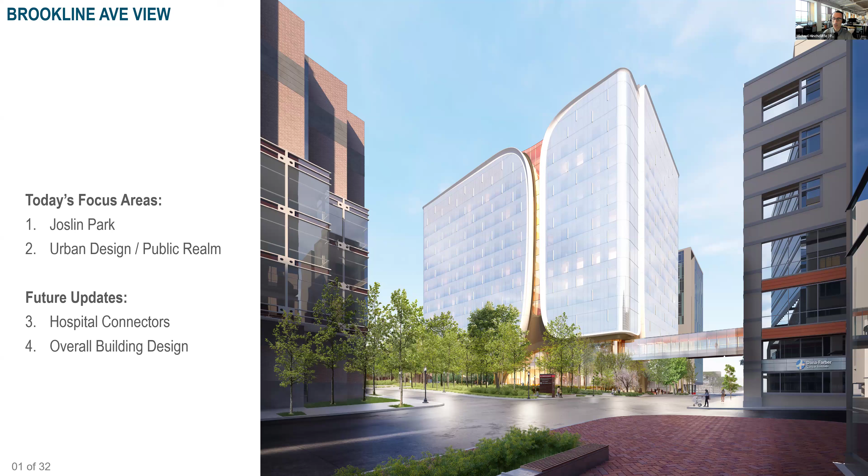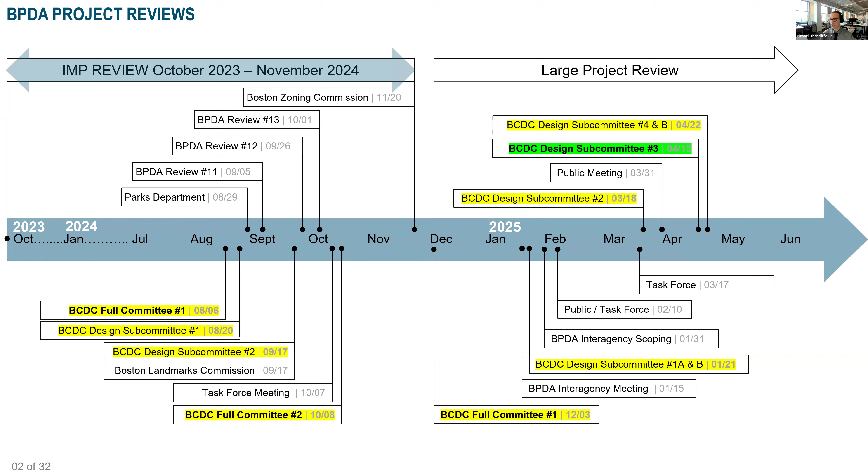As Seth said, we talked a lot about Joslin Park through the IMP process and the many times that we met with you in full committee and subcommittee for the IMP, and then again the summary of when we've met for the specific context of the park. What we wanted to say is that through all of those meetings with you, we heard quite a number of times that we needed to think comprehensively about the urban realm, from building face to building face, and the true pedestrian experience and vehicular experience in the whole district as it impacts the future cancer hospital, the Rosenberg building, which is the home of the emergency department for Beth Israel Deaconess Medical Center, as well as this very valuable public asset of Joslin Park at its heart.

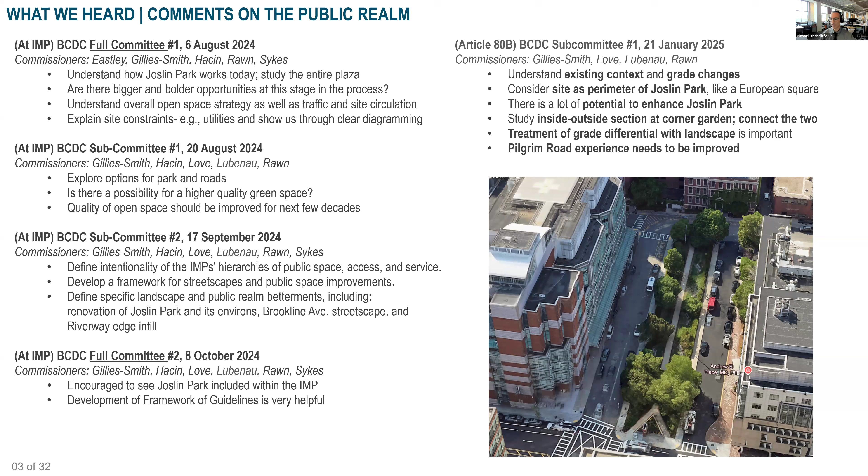We've taken those into consideration, and as Seth said, the opportunity to reevaluate circulation and the park boundaries was one that we welcomed with open arms. Chris has some very interesting things to share with you in terms of the development of Joslin Park.

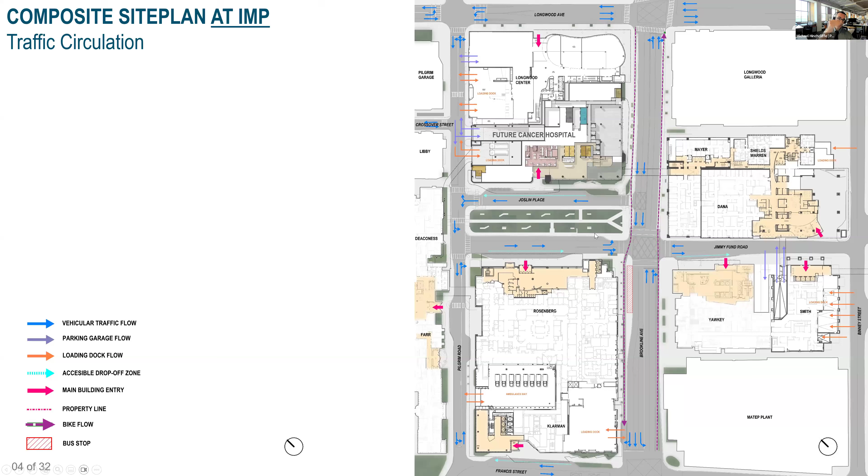As a reminder of the scope, here we are in Longwood Medical and Academic area. To refresh your memory, the Future Cancer Hospital is located between Brookline Avenue, Pilgrim Road, just to the south of Longwood Avenue. Today we'll be talking about Joslin Park, which is currently 2 one-way couplets of Joslin Place, which heads west, and Deaconess Road, which heads east.

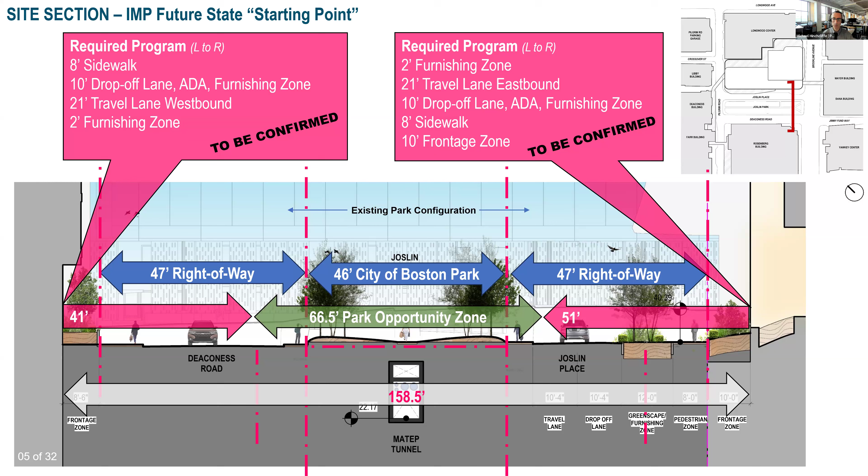At the institutional master plan, we really talked about the need to evaluate, as I said earlier, building face to building face. So when we look at the front facade of the cancer hospital on the right, all the way to the existing front facade of an entry to the emergency room in Rosenberg, how much leeway do we have there to think more comprehensively about the parklands? With this overhead view, and Chris, let me know when you'd like to take over.

We see that the existing park today is similar to parks that you find in the South End or other older areas of the city. That is really a very linear park with static boundaries and edges that has many opportunities, when viewed from its approaches, for a more dynamic environment.

So Chris, let me hand it over to you to talk about some of the design principles that underlie the studies that we're presenting today. Sure. Thanks, Michael, and thank you all for being here tonight.

As you all know, you've encouraged us to look at the park more comprehensively and especially how it engages with the larger public realm. It is, as Michael said, a very linear, narrow site, and the way that it's framed by four streets makes it a bit disconnected from the larger urban fabric.

And so the opportunity to color outside the lines a little bit has been quite liberating, and a lot of fun for our team to think about how this park really could engage the neighborhood at a much larger scale, have a larger impact. So we've gone through this study with some principles in mind, principles that have formed out of conversations with you all, with the planning department, PIC, parks, etc.

These are sort of high level, but have been the underpinnings of all of our studies to date. At the core, this exercise should improve accessibility to, from, and through the park. It should eliminate unsafe pedestrian crossings by redirecting existing desire lines that are often in conflict with vehicular traffic.

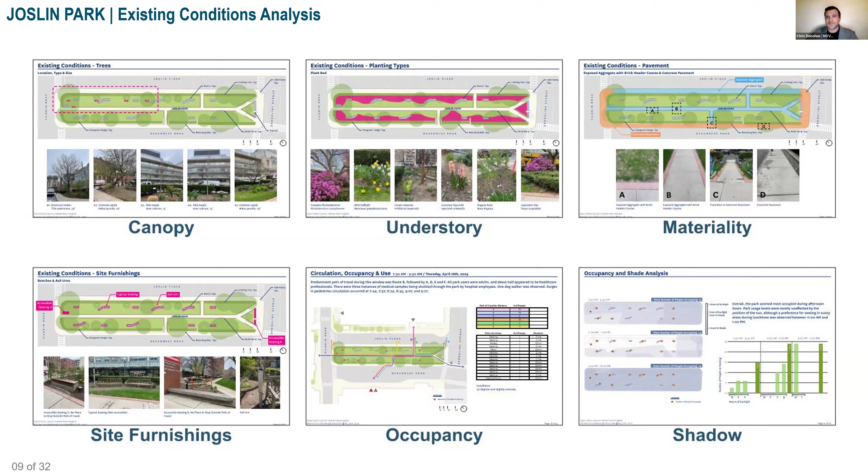We also looked qualitatively at what makes this park a good place to be, a good urban park: the role that planting plays in creating a sort of garden frame in an otherwise very urban and institutional scale environment, the role that an urban canopy plays in providing comfort and carbon sequestration in the city, and the role that ample seating plays in providing a welcoming and accessible environment for people.

But then we also looked at the existing opportunities for improvement, that linearity of the park only sort of exacerbating the scalar issues, right? It's incredibly narrow, and by having just a single path with open lawn adjacent to it and a single frame on either side, it's quite limiting in terms of how the park might be used and the experiential range that you can get from it.

That lawn that frames it, because it's just a single narrow path, is often quite beaten by people walking off the side of the path to go around one another. And that, as I said, the role that the four streets on every side of the park play in really disconnecting it from its context and making it somewhat difficult to access and use comfortably.

As I said, we looked at the occupancy, we looked at how people travel through the site, took a quite detailed mapping of who's moving through the site, when, at different times of day, in different conditions, weather conditions, etc. We took stock in terms of what people were doing there.

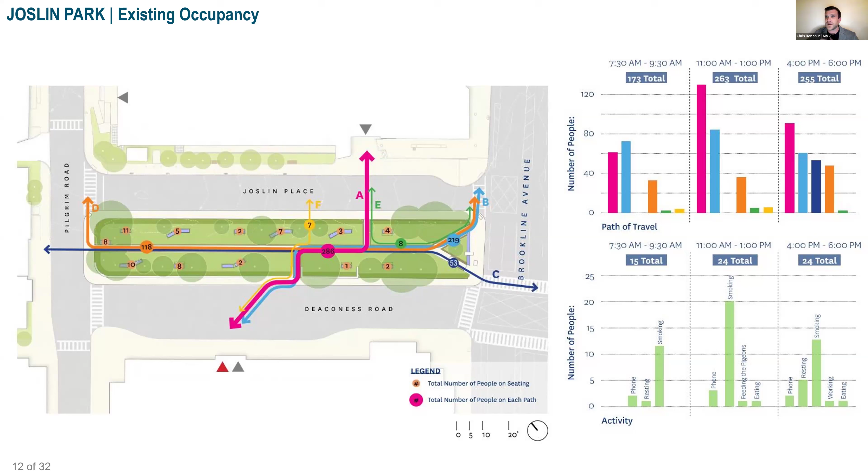We distilled that diagram of pedestrian circulation down to a sort of what does this all mean? And notice that, as I said, quite a lot of people are crossing at places that are not intended for pedestrian crossing. They're crossing, stepping out between parked cars, illegally parked cars, and into traffic on very busy roads. So thinking about how we can improve that condition as well with this study.

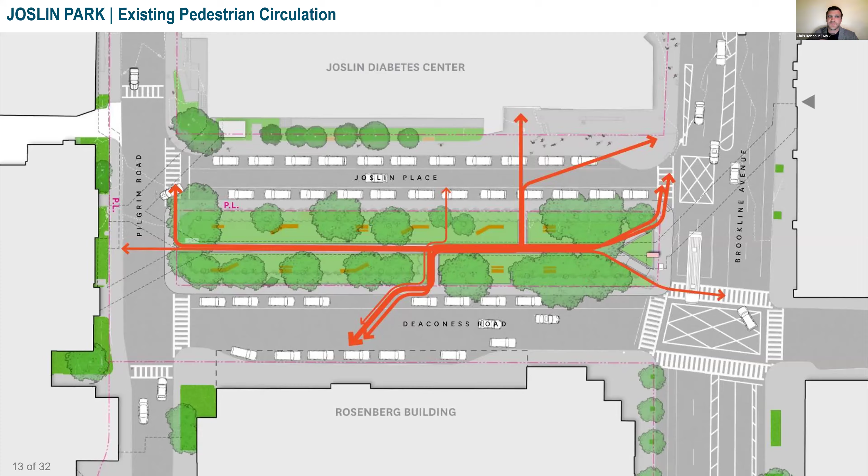As we all know from working in Boston, just like any other urban street, there are lots of utilities that run through the park and the right of way. Some of them are quite shallow, including the tunnel that runs underneath, right down the center of the park. There's also existing chilled water lines and an electrical duct bank that runs along the north end of the park.

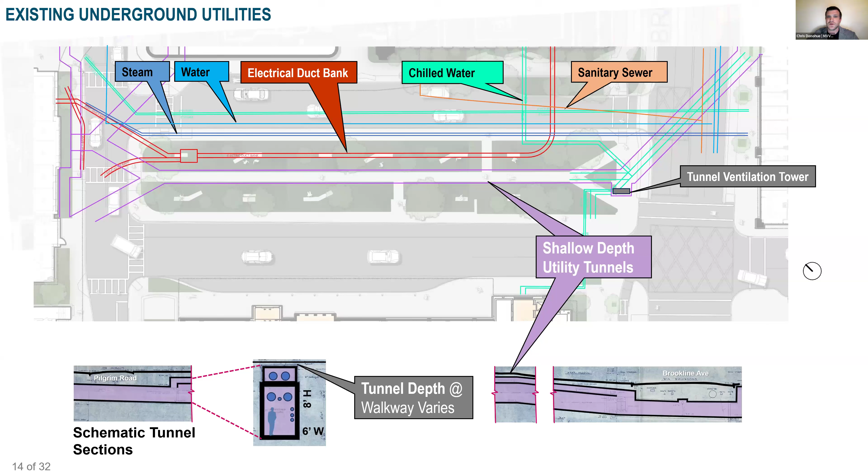And then steam and water lines that run through the street, as well as sanitary sewer, and that existing tunnel ventilation tower that also doubles as signage for the ER just across the street.

I saw when I was preparing just a minute ago that these diagrams are mislabeled—that's my fault. But noting that there are lots of ways to look at this, we've looked at how to manage pedestrian crossings and vehicular circulation dozens of ways. I've distilled this down to four high-level exercises for clarity.

Looking at the first one, a series of perpendicular crossings across both Joslin Place and Deaconess. Those crossings marked in orange would be new.

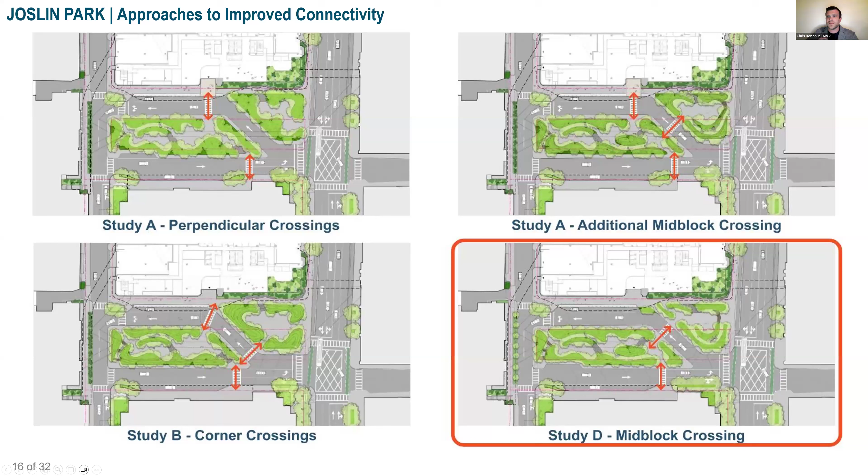Additional mid-block crossings, top right, bottom corner, suggesting that crossings happen at the corner in this new reconfiguration of Joslin Place, and the last one being a single mid-block crossing that focuses pedestrian circulation between the two park networks.

I'll focus on that last plan and how it's developed, just to talk about the park broadly. The idea was to create something with a lot of connectivity through it, connectivity to the adjacent public realm and to the adjacent buildings, connecting to Brookline Avenue and from Pilgrim Road.

Most importantly, in what initially felt like a bifurcation of an already relatively small park, we're actually making it even more well connected to the urban realm, so that these two park networks become really well integrated and quite diverse in how they offer a range of experience for people in the city.

The result is a series of terraces that gradually step up from Brookline Ave to Pilgrim Road—east to west in this drawing orientation—stepping up off of Brookline for a sort of elevated terrace, and then a network of pathways, if you go to the next slide please, that weave these spaces together.

We've turned that gradually sloping lawn with a single path into a network of accessible garden rooms or event spaces that are connected by a really robust and diverse set of meandering paths through the park.

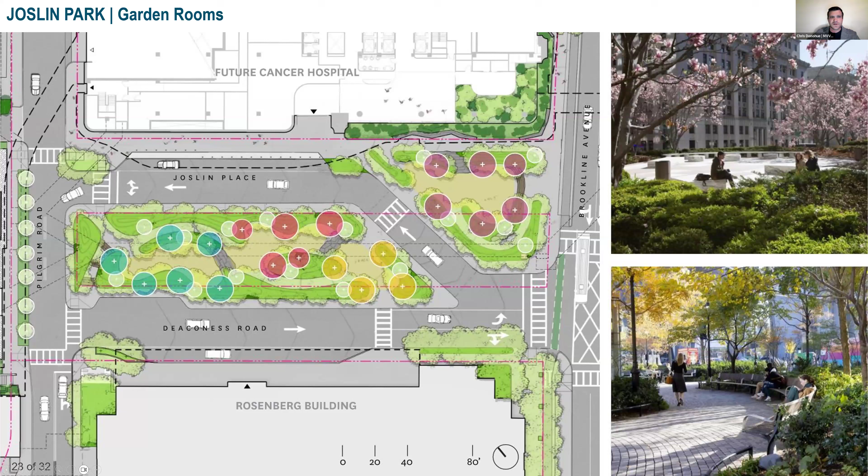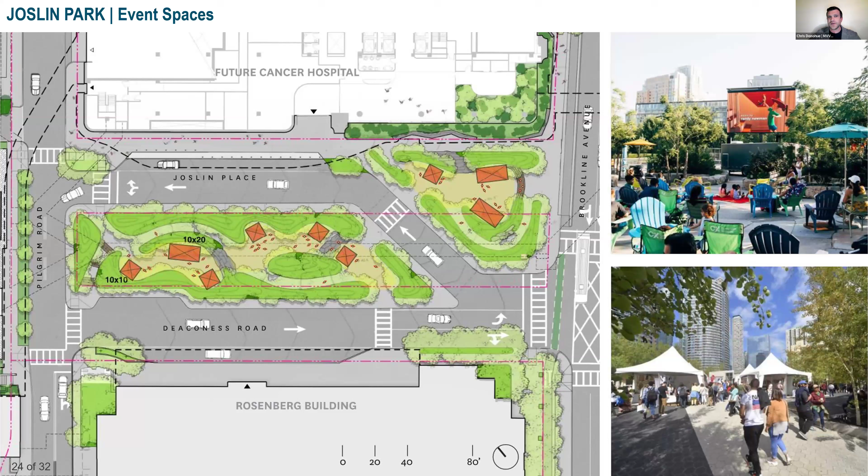Thinking about how those landscape rooms or garden rooms can also be programmed and activated. They're not very large, but they're large enough to be pretty impactful in terms of gathering people. This shows a series, just for instance, of 10 by 10 and 10 by 20 tents that could be used for farmers markets, or a networking event for the LMA. Lots of ways to think about how we could use this space, and it becomes more of a destination within the city.

Those rooms are framed by a series of garden meanders that are framed by planting, allowing for a more robust urban canopy and lots of ways to move through this in a very accessible way.

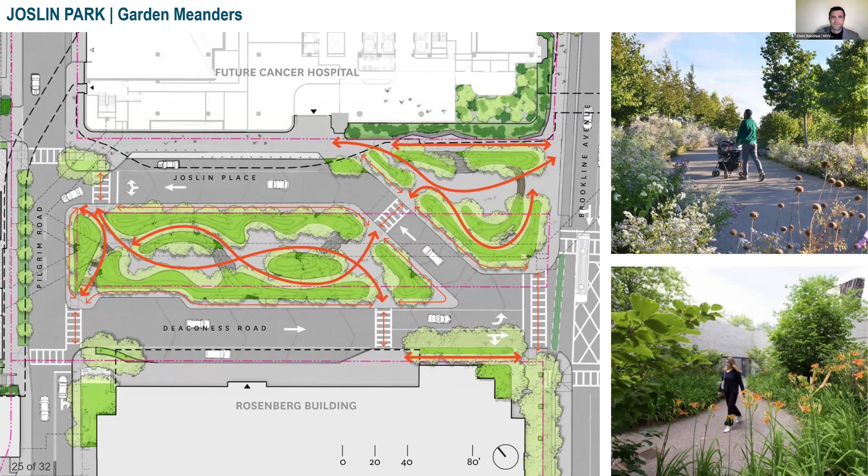Some of that negotiation of grade becomes an opportunity to create gathering places, amphitheaters, stone outcroppings, places for people to sit and eat lunch and gather together.

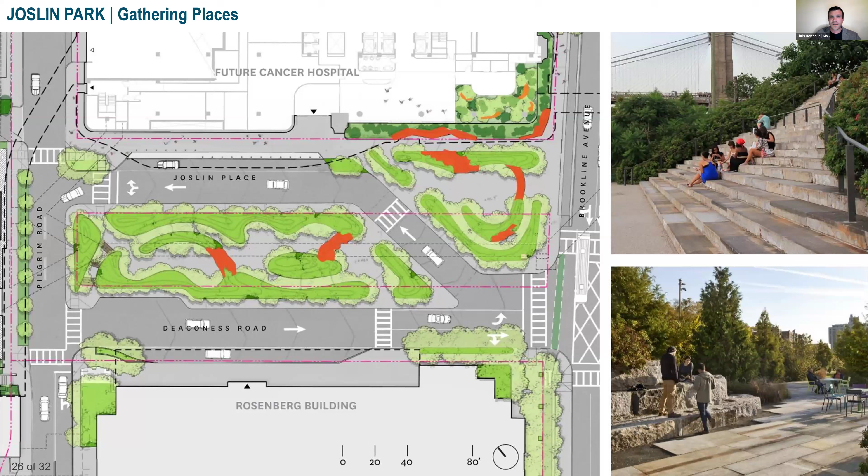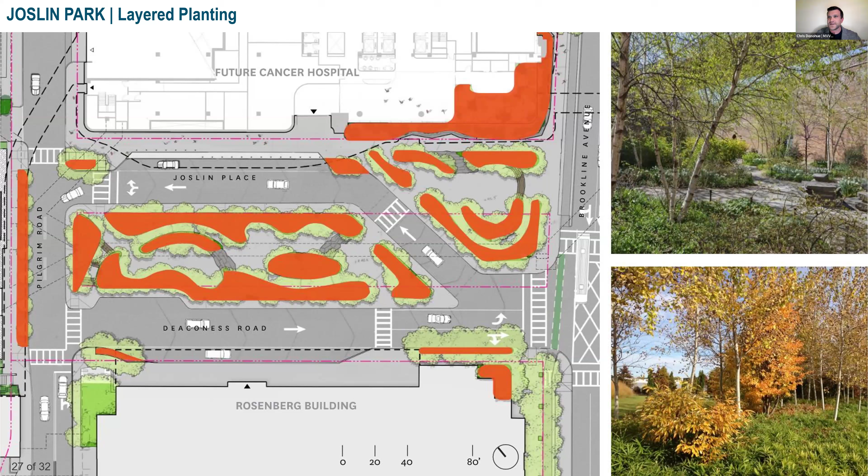Those rooms are framed by layered planting, understory, mid-story, and canopy trees. Those of you who know our work know we're really into planting and creating really robust urban environments.

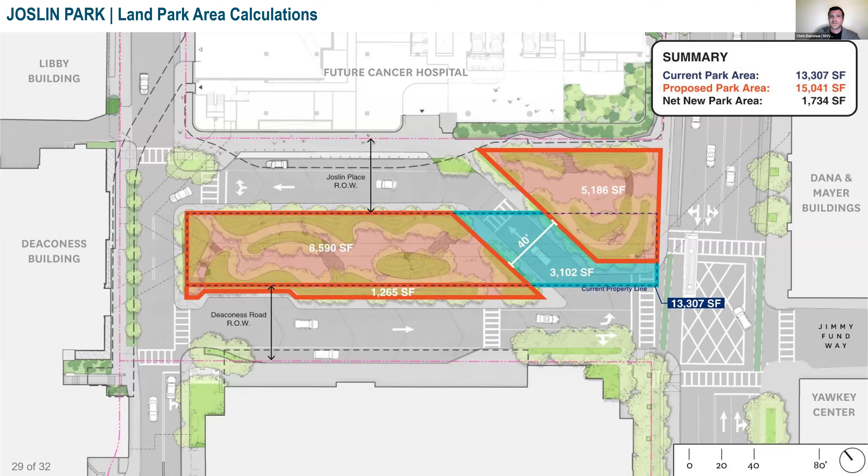This also shows how the plan negotiates and helps to simplify some of the really important traffic that comes with the medical facilities in this area, creating a new visitor and patient drop-off area for the cancer hospital, and a valet or patient drop-off for the emergency room at Rosenberg.

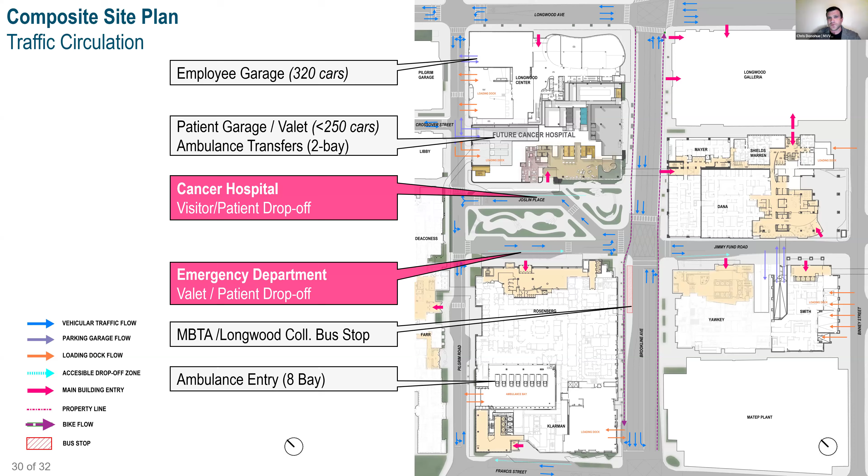We can leave it here just for conversation, I think. But the idea, or the opportunity, is a park network that's really well connected, brings people into this park not just for a quick phone call, but gives places to gather, places to spend time, ways for the LMA to gather as a community in outdoor public space, and significantly increases the park's capacity for programming and accessibility.

Thanks, Chris. That concludes our presentation, Seth.

All great, right, commissioners. Anne Marie, I think you're muted. Okay, thank you, sorry about that.

Thank you for the presentation. I just have a question: could you talk a little bit about circulation through the site, in terms of how patients or people there with family members would move through the site? As we've reviewed this project, I know a consideration has been the movement between buildings, there is pressure on internal circulation to move between them. Looking at this plan, the circulation as outlined looks a little bit circuitous. I'm curious, if I'm in one building, is it likely I'd be moving from Rosenberg to the future cancer hospital? Help me understand the typical movement between buildings on the site.

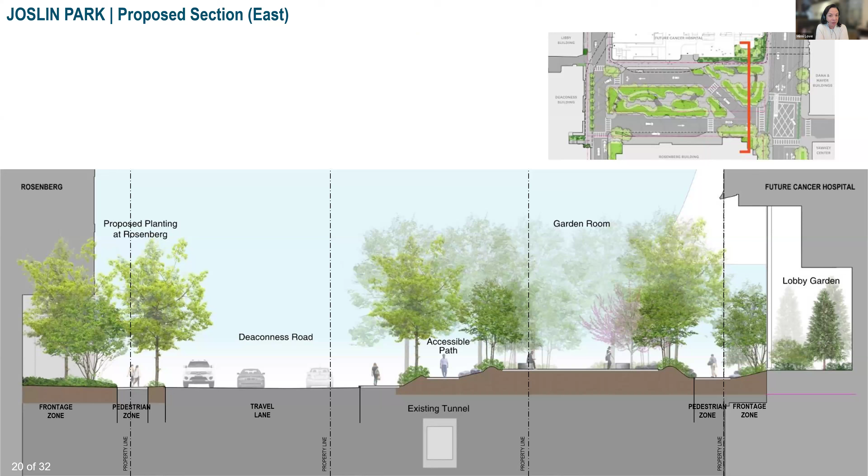Maybe I'll chime in because I'm going to echo what Shauna said. I think this is very exciting. I don't think we imagined that it would be so transformed. But what's really strong is that connection between the winter garden lobby to now the landscape. And this entry point, in my mind, really rationalizes where your entrance is to the building. Remember, I was always a little bit challenged by where that entrance is. And now I think it actually almost post-rationalized. Maybe you knew it was going to happen the whole time, but I didn't have that insight. So I think it's really strong.

I do have two questions. There is that one sidewalk that's labeled, between the winter garden terrace and the terrace that's labeled 43.5. There's that sidewalk at 5%. It kind of feels like it's taking you to nowhere. There's not really a crosswalk. And so I'm just curious about what happens up and down that street. I'm not suggesting that it goes away, but it just feels like there's no destination for it. So something might be considered there.

And then the other question I have is, because emergency vehicles are getting to the Rosenberg building, I trust that you worked this all out, but it feels like there's almost a pinch point, and I just want to make sure that all of those discussions have happened with BTD to make sure that that's not going to slow ambulances from getting to the Rosenberg building. But overall, I think this, I echo what Shauna says, very exciting.

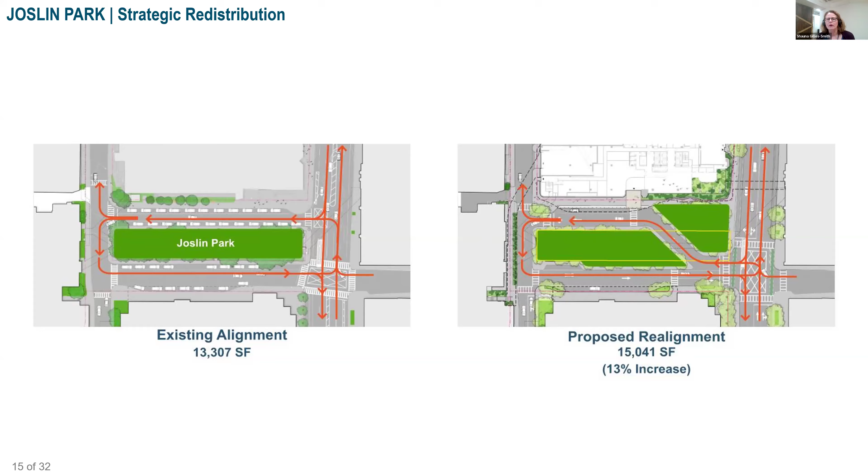Yes, very specifically, the width of the redirected Joslin Place is one 20-foot way, one single lane of travel with no parking on either side. 20 feet is the minimum for emergency vehicle access. So the single lane continues as a single lane of travel throughout Joslin Place, defining a distinct drop-off organized into accessible drop-off and regular drop-off underneath the canopy of the hospital entry. Joslin Place is intended to be one single lane of one-way travel from Brookline to Pilgrim Road, with a distinct defined drop-off and no parking intended on either side for its length.

Deaconess is similar. It is also sized as one 20-foot travel lane with one singular drop-off organized for both valet and emergency drop-off. At the future cancer hospital, we'll have valet parking and service inside the garage.

At Rosenberg, it's still a very busy mixed entry, but the proposal is for one lane of eastbound traffic. We are holding, for discussion purposes, a separate lay-by here that could be used for shuttle bus staging, or for overheight transport vehicle parking. Sometimes chair cars and other patient transport vehicles aren't large enough to enter parking garages, so this serves as a kind of lay-by staging area for those cars.

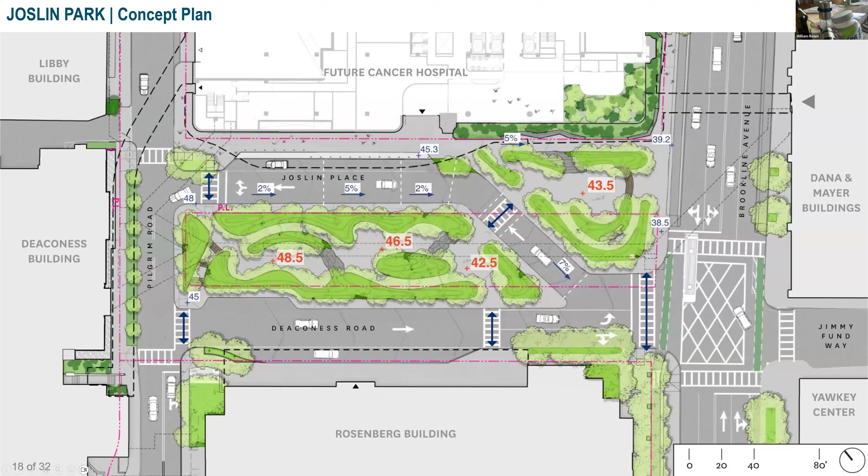This is Bill. Michael, or anyone can answer my question. This follows from a couple other questions that have been raised. I'm looking at the buildings on the east side of Brookline Avenue and imagining people from those buildings wanting to use this park space. I realize there's real advantage to having consolidated traffic coming onto Brookline Avenue from either side—that's a very positive thing. But I am struck by the fact that there's not kind of a through passageway from those crosswalks on the east side of Brookline Avenue into the park, and I'm curious why that is.

Chris, do you want to respond to that? Let me know if there's a different slide you'd like me to bring up, Chris, to talk through this. No, this is a good one.

It's definitely something we're still wrestling with. I will say that negotiating the 10-foot grade change from east to west plays an enormous role, while also trying to stay above that existing utility tunnel—it plays a very challenging but enormous role in trying to weave these navigable and accessible pathways through.

So I think we're still trying to get the desire lines exactly right, and you've identified a good one for us to focus on as part of a next study. But I think the idea is that coming from that intersection you've highlighted, people would either walk along the sidewalk that runs along that new slanted, realigned portion of Joslin Place, or just go a very short few steps to the north and up into that terrace, or through that meandering pathway.

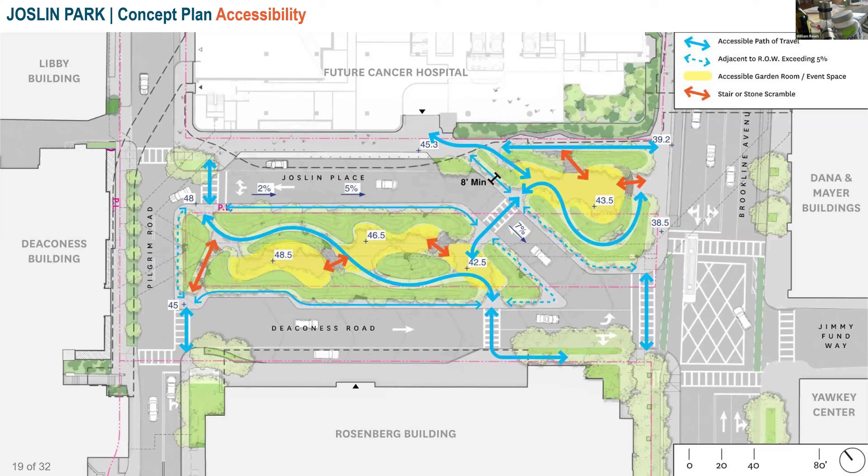I'm still learning the elevations of this, but I encourage you to continue to look at that. Certainly, thank you.

Go ahead, Anne Marie. If I could just add to that, I want to continue to push a little bit on the role of connections that Bill was describing, I mentioned earlier. As I reflect back on the evolution of this project, I think a big piece of what I felt we've been grappling with is how do we unify this collection, how do we take this opportunity with a major investment by the hospital on one of the sites to unify a collection of buildings that have a shared purpose. And I think the park, in my mind, has always played a pivotal role in that.

So this is not a critique of the quality of the landscape you've created, but rather thinking about the relationship of the landscape vis-a-vis the campus of buildings. And I just can't help but look for something that is a space that helps to center an individual, much the way Central Park, albeit totally different scale, is sort of a center or an anchor for New York, for the neighborhoods surrounding it.

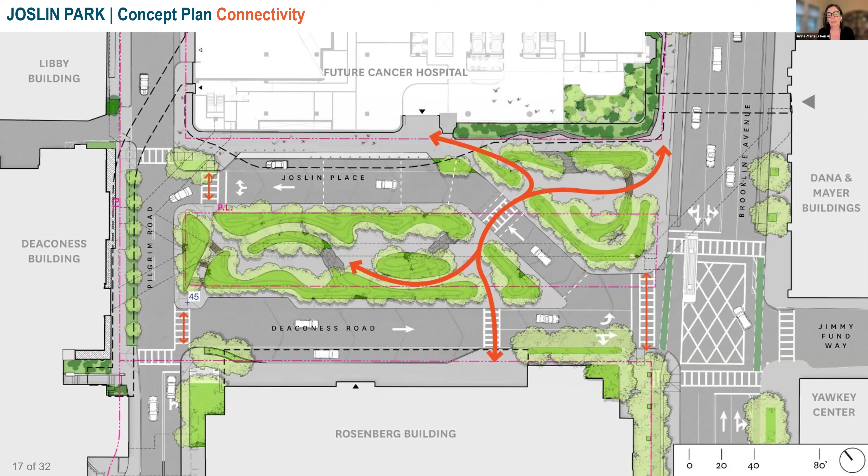And I too am trying to catch up and understand the role of grading and elevation. When I look at the plan, it frankly creates more confusion for me than assistance, and a sense of centering. So that's just one thing I'd encourage you to think about as you look at this.

And frankly, even driving, making that turn from Brookline into the campus, I worry a little bit about turning in there in a car and thinking, oh, is that one street two-way or not? Just sort of thinking what is it going to feel like to turn into that space. So I know the team has a lot of experience. I have confidence you will figure this out, but these are the questions that come to my mind when I look at the proposal. Thanks.

Can I just pick up on that?

I'm not agreeing or disagreeing completely with Anne Marie's statement, but I think at this point there's a real consistency in the green kind of closing off the outside. In developing the project, a lot of it will be about the scale of the planting and where the trees are thicker and thinner to help with that visual connection from one side to another. I think that's really a subtle development of the plan from my perspective, rather than a dramatic change.

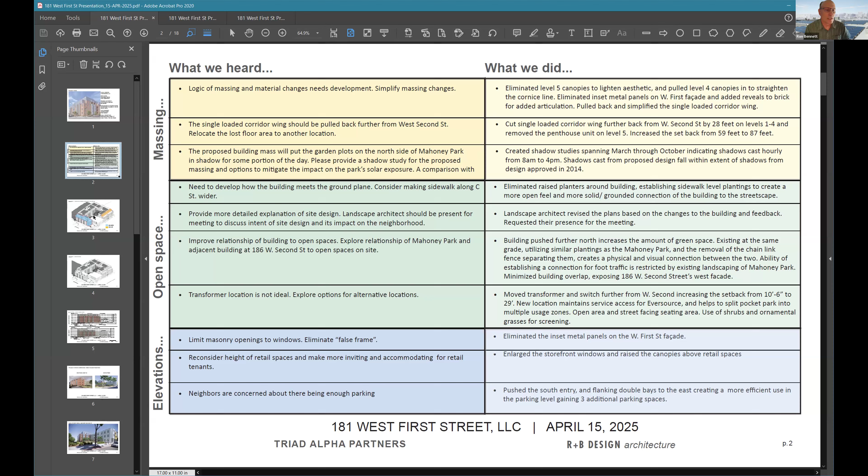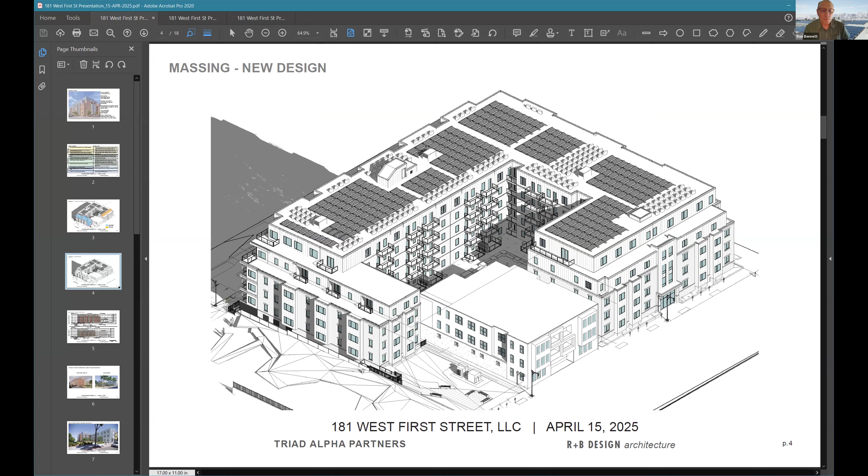This is the western side of the building facing toward Mahoney Park. This is what we're proposing today. We've stepped back both the 4th and 5th floors to reduce shadows on the gardens next door in Mahoney Park, and pulled back the entire 5th floor on this wing to reduce its impact on the park and our neighbor at 186 West 2nd Street, an existing building that we're essentially building around.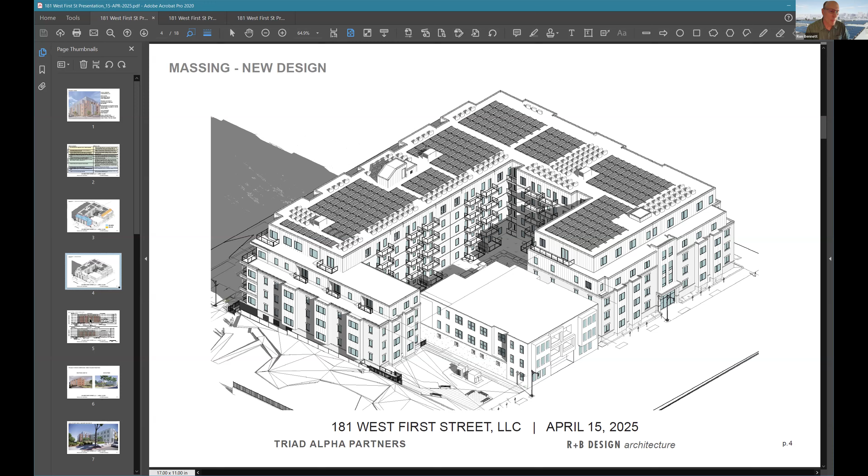On the west facade, I want to compare where we were in January to where we are now. You can see the penthouse at the top on the 5th floor has been eliminated, and the entire building pulled back from less than 60 feet from the property line on 2nd Street to almost 90 feet now, resulting in a pocket park that we're creating in front of our building, adjacent to Mahoney Park.

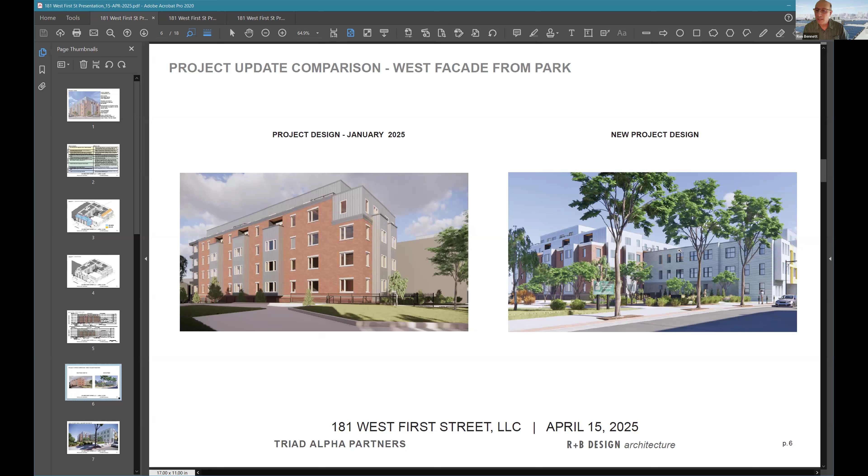Here's a 3D view of that modified design—the original presented here in January, and then the current design with the pocket park developed, also showing our neighbor's building at 186 West 2nd in more detail. Another view of that same space.

We have a landscape design by MDLA—if you have any questions, Anton's here to answer them. We're surrounding the building with sidewalk level planting, anywhere from 5 to 9 feet around the building, and adding a number of street trees. Of course, the feature open space is our pocket park adjacent to Mahoney Park.

The grade is essentially even across the property line, although there are established plantings now in Mahoney Park that we'd prefer not to disturb. So there's a visual connection, and the spaces should read as one—our pocket park with Mahoney Park—but there's no physical connection to walk between them, though they are easily accessed from the sidewalk on West 2nd Street.

We have our electric service in this space for lack of another place to locate it on the site, and we will screen it with vegetation to do our best to conceal it. Mahoney Park actually has something very similar in this area, number 6, where they have their switch and transformer close to the street, also behind a vegetative screen.

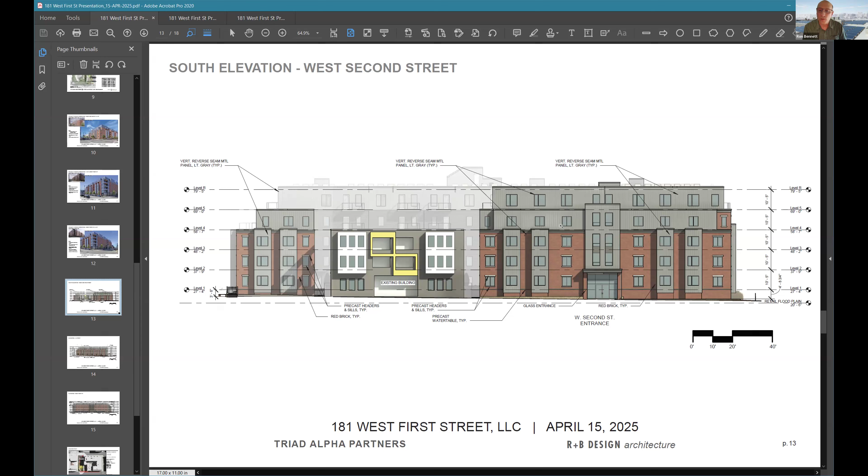We have elevations here, which I think are really better represented in the 3D renderings, but we've got them here for reference. Our 3-story building relates in height to our neighbor, and then we've got 2 stories above that in metal with the 5th floor setback. The C Street facade and the First Street facade.

I do want to mention that in the refinements we made to the massing and the setbacks we added to the west side of the building, the shadows—I have a complete shadow study, but these are a couple samples from that study that show that the shadows cast from the proposed design as it stands today fall within the shadows that would have been cast by our 3-story 2014 design that was approved in 2014.

So this is April, August at 11 a.m. And you can see the shadow falling within the red dashed line, which represents the shadow cast by the design approved back in 2014. It's later in the day, middle of the summer, and we're not casting, in midday, any shadows on the gardening plots in Mahoney Park next to us.

If you'd like to see plans, I have them in an appendix. We really wanted to focus on the massing and the building envelope or the facades. I do have additional plans and renderings if you'd like to see those.

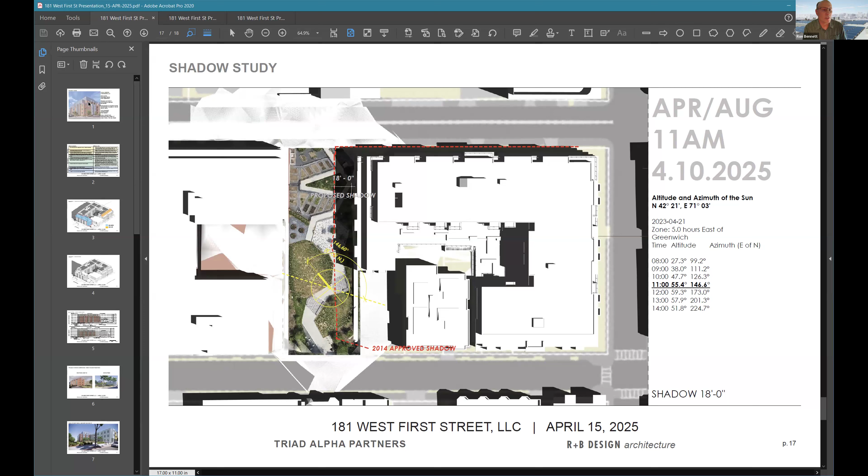Ron, I might suggest focusing on the proposed open space. Yes.

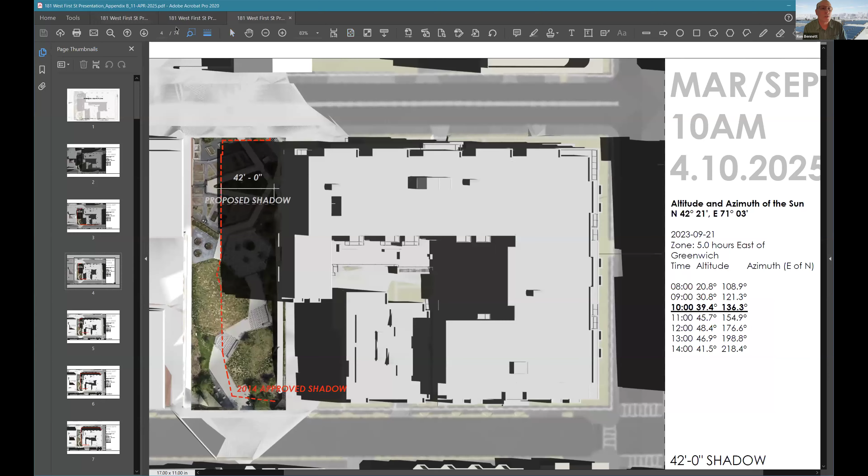We have open space in front of the building, what I'm calling the pocket park. And then, you know, I do need to refer to another plan because I don't have one that shows the interior courtyard. Here it is.

So behind 186 West 2nd Street, we have a courtyard, an internal courtyard with private decks, and it's elevated above street level, approximately 3 to 4 feet above street level. We'll have common area space for any of the tenants to use, as well as some private decks shown here in this lavender color.

That's our open space for the tenants only, and it's our intention to try to reserve this space out front, the pocket park, for tenant use as well. I mean, it's essentially their front yard. And we do have Mahoney Park right next door, which is a public amenity. And then, of course, there's landscape buffers all the way around the building.

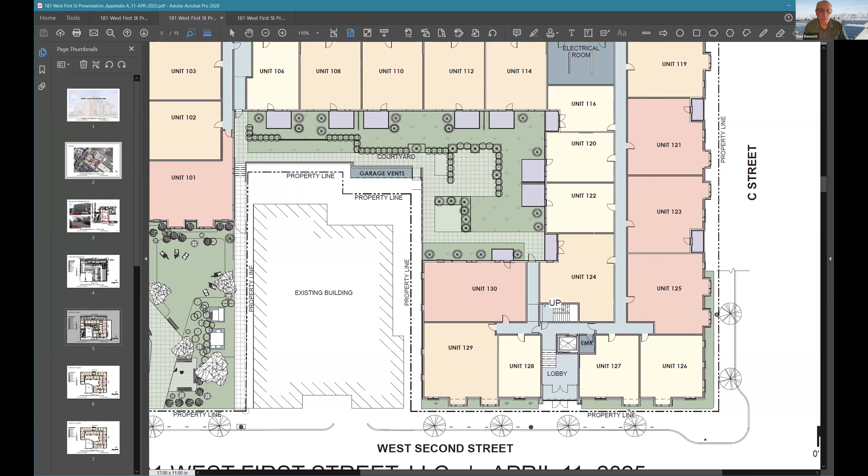And on First Street, oh, I need to go to a different plan. Here it is. Where our retail spaces front on First Street, we've got outdoor seating, wider planting areas, and a nice wide sidewalk, bike share, street trees, and a dog relief area.

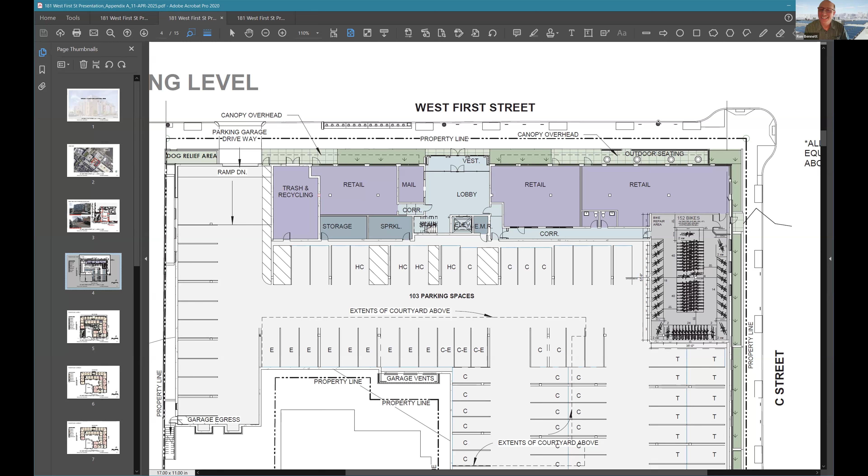Do you have any questions about the open space or anything else? And Ron, did you say your landscape architect was with you this evening? Yes, I'd like to introduce Anton from MDLA. He can get into more specifics about our pocket park and the landscape design.

So I might ask for you all to do that in the final minute and a half you have. I would say in particular the streetscape as well as the pocket park. If you could just go into a little more detail about materiality and programmatic intention, that'd be great. Sure, I'd be happy to.

Yeah, we're complete streets compliant. We're using the 4x8 foot tree pits, 30 feet on center. There's currently no existing trees on West First and C Street along our property, so we'll be adding green to those areas, which we're really excited about.

And we're also adding a lot of guest parking spots, everything that obviously Complete Streets calls upon. We're running that brick apron pattern along the concrete walkway to match what's going on in the neighborhood right now. Permeable pavers at all the entrances. We want to add a nice...

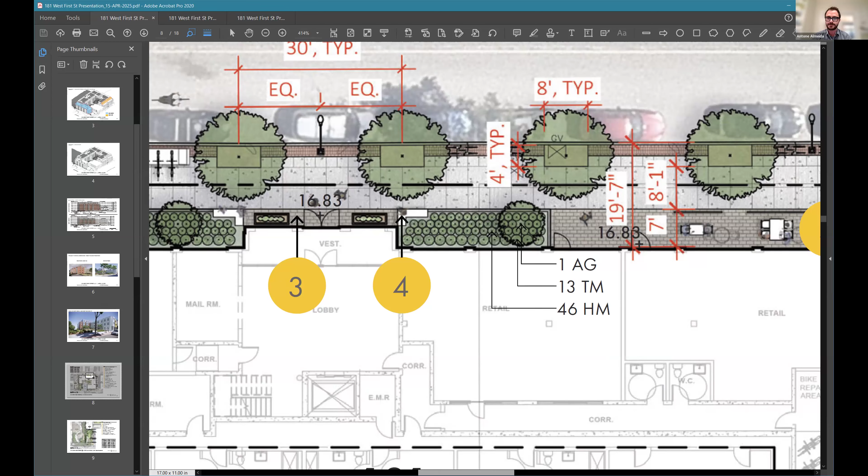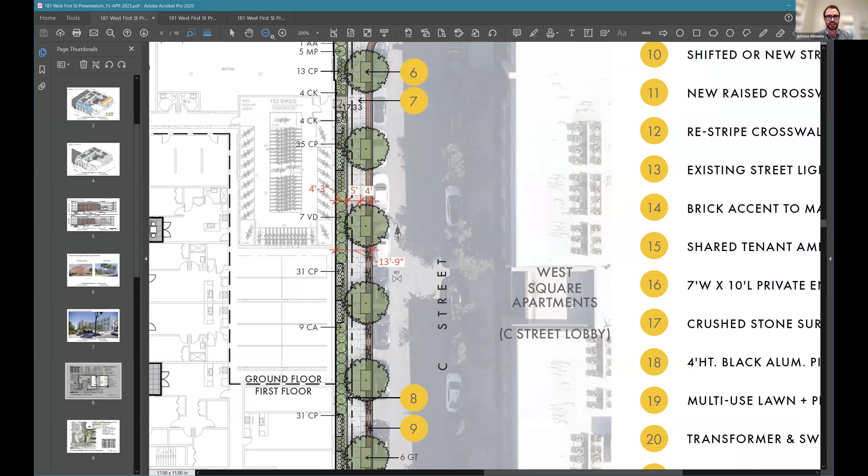And then moving east, we have some more permeable pavers and some patio seating. There's a little bit of a slope, so we have a wall and fencing there. And then, moving down C Street, we've incorporated taller shrubs where we can, and where there's building overhang, we have more of a low ground cover, while also adding a row of honey locusts along that street. And then that's a continuation of the honey locusts around that corner, more permeable pavers, and then more planting that obviously does better in the sun, as this will get more sun in this location.

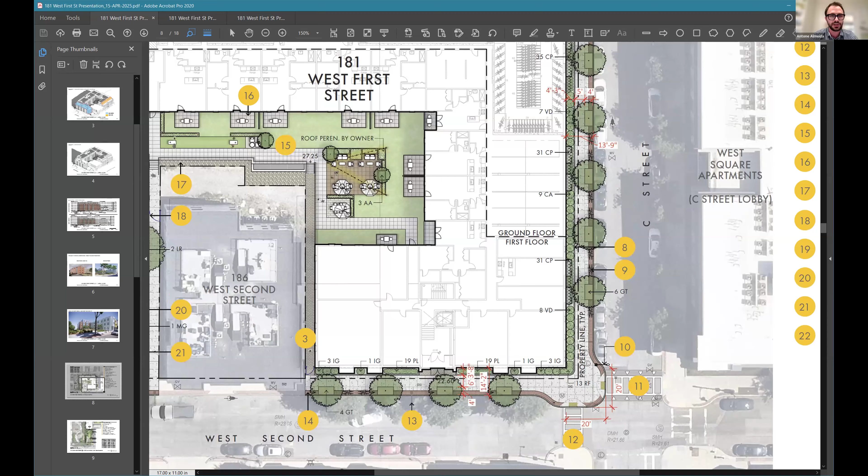And then I could quickly review the amenity deck. We're showing a variation in the type of paving up there. We're using deck tiles and porcelain pavers as well. So we wanted to break it up into a game space, and into social areas for the tenants to enjoy, while also giving a little bit of privacy to the private patios that everyone has.

Can you describe, I understood it was 3 feet higher than grade. So how does that intersect with the adjacent building? The intersection, the middle building's first level in the rear is a parking garage. So we are probably 3 feet higher than their parking garage, which comes up 8 feet. And then they have a little yard space behind their parking garage. They don't seem to be using the yard space very much, but that first level is a parking garage for them. Our parking garage, which comes up below this courtyard, the center courtyard, is about 3.6 feet above grade in this area. So their garage is about 8 feet above grade, and ours is about 3.6.

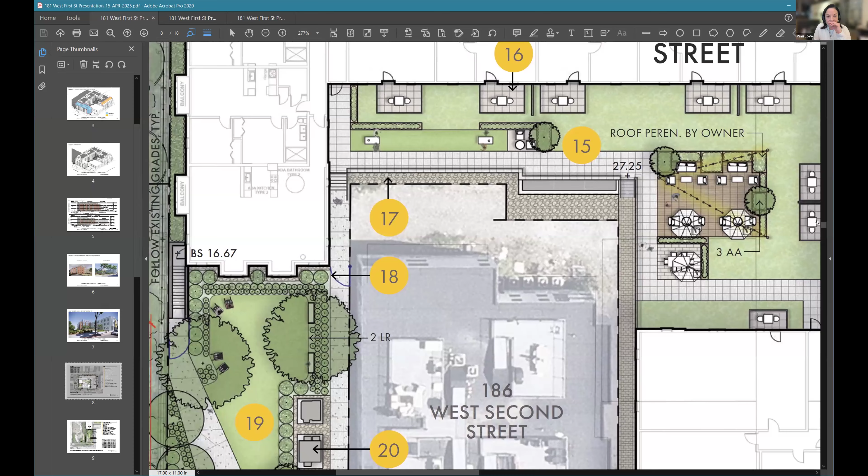Okay, now we're at grade on the sides coming down next to them. You see these two staircases that come down. We come down to grade pretty quickly, and all that area is at grade around their property.

I don't know that I'm understanding. Is there some retaining wall? There's a foundation wall that is right here. It's part of the foundation wall of the building, because that's the garage, and this is a foundation wall of the building too. That's units on one end, and then as you go over, you have the foundation wall. So that's all foundation wall.

Our concrete podium sticks out of the ground back there, but we're still well below their first floor. You're about 3 feet above grade in the living areas. This is all built on top of the garage. This courtyard is built on top of the garage. We have parking under here.

So that dashed black line is the property line, right, but that's at grade with the hatch area north of it. Yes. Okay, and then so the retaining wall is what you're calling the foundation wall. Yeah, it's the foundation wall. We're set back 3.5 to 5 feet from the property line in all cases.

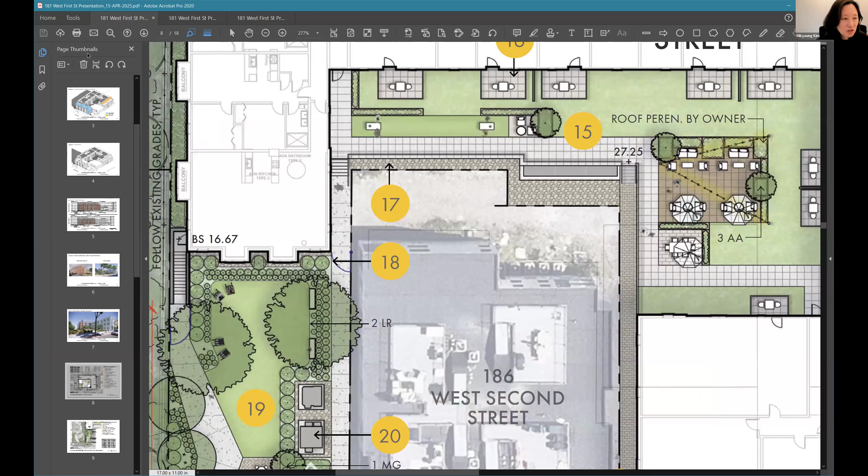Is there any other questions? Could you just talk about the semi-public park? Sure, Jason. And specifically the relationship, like the transition between that park and the public park. Is there a fence between the two? So currently there's a fence, and what we plan to do is remove 70 feet of it.

And we plan to follow that grade. So if you're walking on West Second, the goal is you won't notice the difference between Mahoney Park and our pocket park. It'll all look cohesive. That's kind of the goal that we have here. And then also we want to block those transformers in Mahoney Park because they're a little bit large, so we've added some shrubs there and some river birches, which are doing really well in Mahoney Park right now. So we really want it to be an extension of Mahoney Park because we know it's really an important part of the neighborhood, and we want to embrace that and have that carry over to our site.

And just to provide the visual extension: the fence is removed, the grade along both sides of the property, all the way from Second Street to First Street, both properties will be graded at the same grade. So the grade will follow the whole park from one street all the way through the whole block down to the other street.

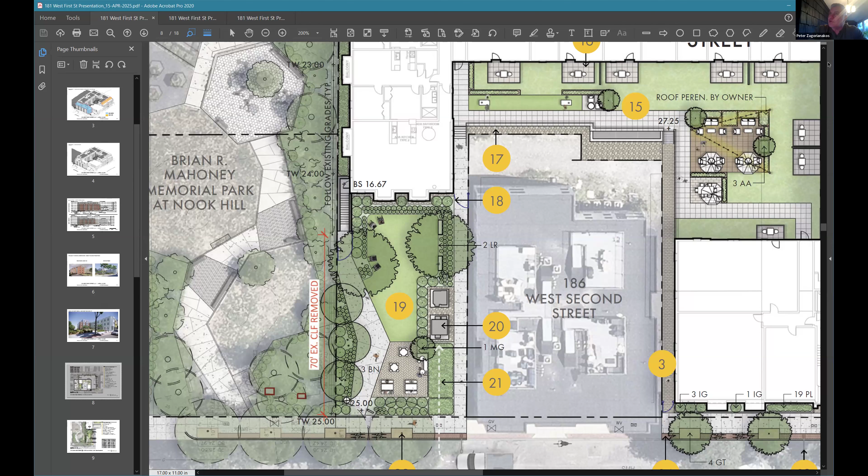That's why we're recommending that there's a 6-foot fence currently between the properties. We're proposing that we take down the first 70 feet of the fence so that the plantings merge together and there is no identifiable barrier between them. And then for the rest of the park, they have a 6-foot fence, which we're suggesting we reduce to 4 feet to make it a little more visually friendly as it continues down from approximately this point to First Street.

And by grading them to the same grade, they have a current block system that grades higher than us, and we will grade to their grade all the way down, using that as the grade coming down the property line for both properties.

I'm just going to acknowledge that we went from presentation to questions, and we haven't really gotten to commissioner comments. But we're a small group tonight, so I wonder if we have to raise hands or just have a conversation. Is there any more commissioner questions? I mean, I think we probably have a lot, we're just trying to digest. So I'm going to let my fellow commissioners go first, and I'm happy to chime in.

Can you clarify what's happening? I understand that you are removing about 70 feet of the existing fence, but keeping the existing fence where it runs alongside your building. Can you help us understand what's happening? What's the material of the fence? How much space, what's the relationship between the building and the fence? What's happening in that space?

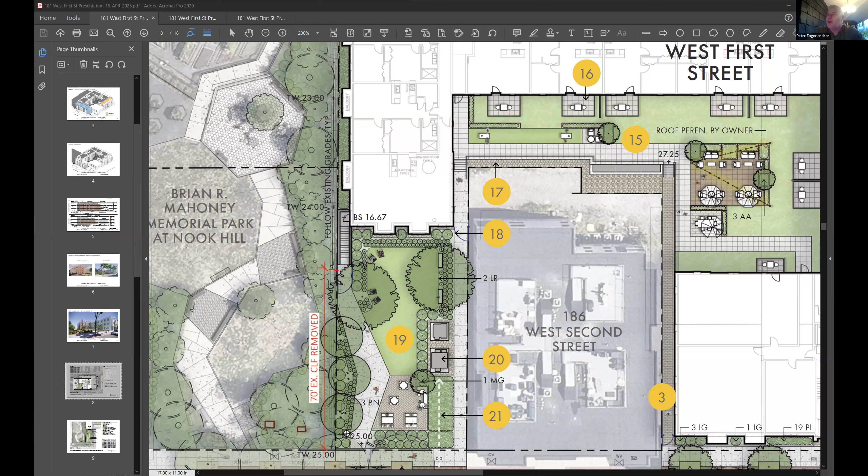The fence, because it's a 6-foot chain link fence, isn't the most visually pleasing fence in the world. So we're proposing to remove it and put a 4-foot chain link fence, which would be much softer in appearance, to divide the two properties. It's their fence, so I think we'd need approval from the city to remove and replace it, but that's what we're proposing. The grading on both sides would be level, and you wouldn't see the concrete blocks along the edge anymore, just graded land between the two properties.

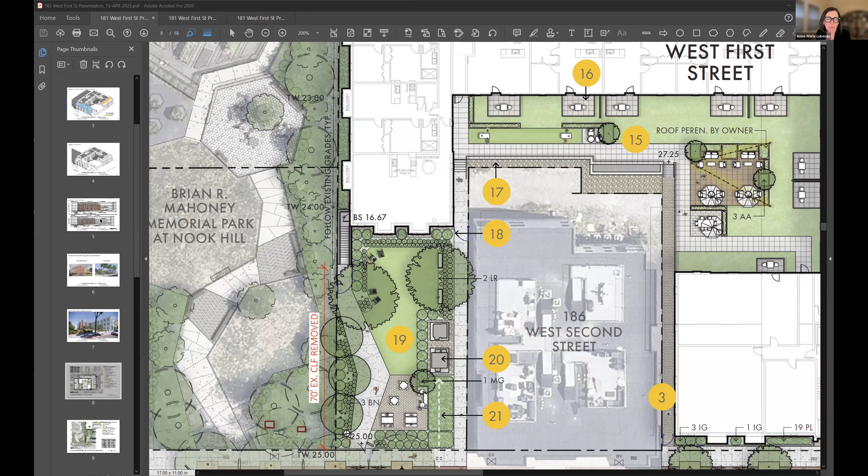And is there a building elevation? I'm looking at the draft presentation, and it looks like what you're presenting now has changed quite a bit. Is it possible for you to quickly pull up a building elevation so we can see what it would look like? So there it is right there.

So the grade you're seeing, the black line is their fence along the edge of the property line. You can see here for the first part of the property where our pocket park is, there is no fence for a long distance. Then you have a small fence area here because we have a set of stairs needed as an egress, which will go on the property line. This fence exists—it's not drawn in as chain link, but it exists. This is the grade line coming down currently. Then as you see it on First Street, the grade accelerates a little more at the last 15, 20 feet of it.

Is the space occupiable between the existing fence and your building? Are those terraces or? No, we simply have a graded area that's between 4.5 and 5 feet wide along the property line. There are no decks there or anything else, just graded area. We do have some balconies on the top, on the 4th level, and then a couple set back on the very top. Both of those are set back—the 4th floor is set back 10 feet from the edge of the 3rd floor, again trying to minimize shadows on the park. The 5th floor is set back an additional 10 feet from the 4th floor, or 20 feet from the 3rd floor.

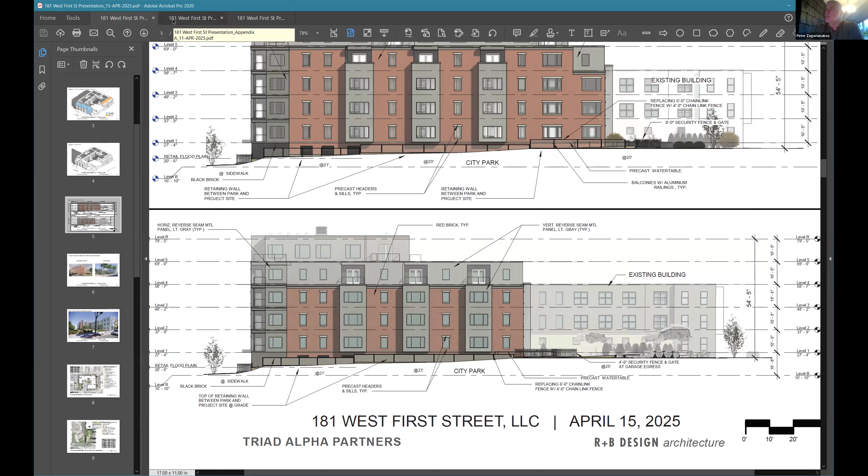Ron, can you go to the slide that shows the elevations between the buildings next to us and us on C Street? You're showing the building to the right, which I know is a bigger building, but the buildings across the street and to the left are smaller, aren't they? Or am I missing something - are the buildings directly across from us 4-story buildings as well? So what we've done - do you have that slide, Ron, that shows West 2nd Street?

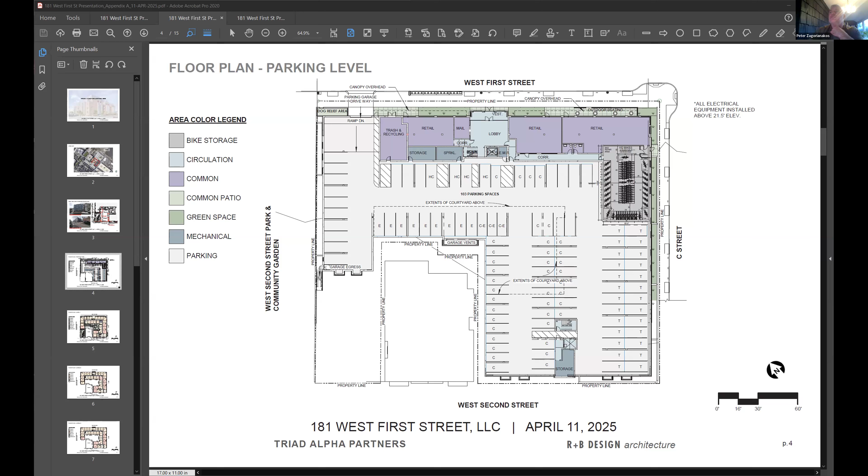Ron, are you there? Okay, go back - no, go back 1 slide. You can - no, West 2nd Street. Okay, I'm going to try to do it from this slide. There is another slide, but this is 186 West 2nd Street.

We kept our 3rd floor elevation in line with 186 West 2nd Street. Do you have an elevation from First Street, though? I can show you the elevation from First Street, but the neighborhood really exists on 2nd Street. There is no neighborhood other than the Signal Building, which I own, on First Street and West Square. So the buildings on First Street are bigger than the buildings on 2nd Street - that's the transition between the neighborhoods. So let me first go over 2nd Street with you.

The buildings across the street from you are 3 stories on 2nd Street, right? I'm just getting to know this neighborhood a little bit. The 2 on the corner are 4 stories, and the one across from us on 2nd Street is 3 stories. So we aligned our 4th story up with West Square, and we aligned our other 4th story up with the Signal Building, which is on the same side of the street as us. We've set back the 5th story so it's not visible from 2nd Street, and we've aligned the 3rd story of our building up with the 3-story building in the middle.

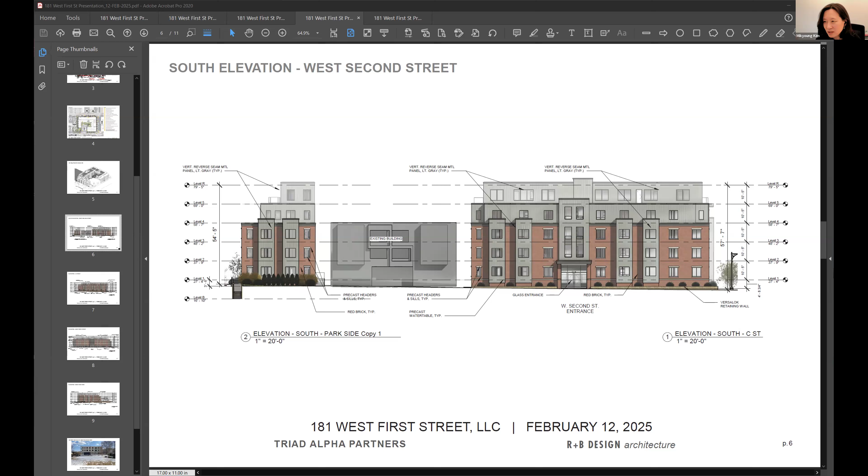Let me see if I can pull up an axon view with the buildings around it. Now I'm going to let my fellow commissioners take over, but I'm having a little trouble understanding the project and its scale in this neighborhood. I think if you could come back with more drawings that showed not just the building itself, but its relationship to the context, that would be great.

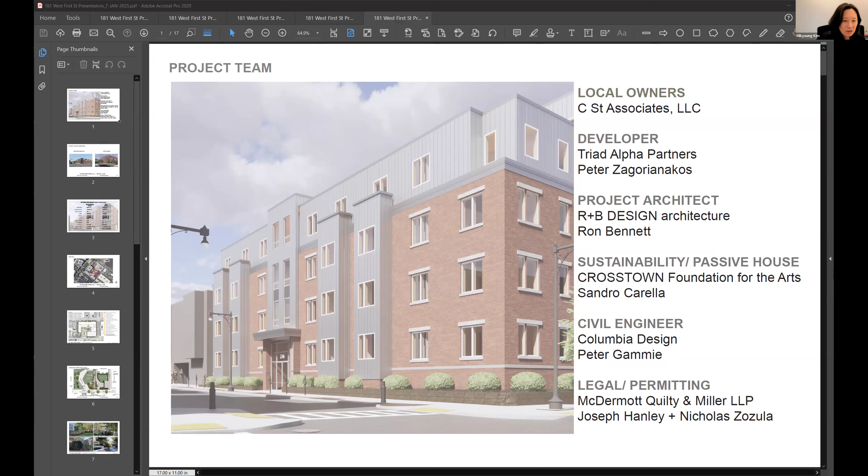I can actually give you an elevation if you'd like to see it. Perfect, that'd be great. All right, let me show you - I'm going to share my screen, Ron. I think Peter, the commissioner, is asking for a drawing we haven't seen yet tonight that shows this building in context with the surrounding buildings. Yep, okay, all right. So we'll do that at another time then. I think that would be so helpful.

It's not really saying that there's anything right or wrong about the project. I just don't, when I'm walking through this neighborhood, and I may be walking through the wrong part of it, there are some very charming Victorian style houses, and I'd just like to see, I'm not against bigger buildings, but I just want to see how things fit, and there's something kind of charming about this neighborhood today. So I'm going to go to landscape.

There's a difference in how you're creating streetscape to your building versus your neighbors, which I think I understand, but I'm not sure. You have a generous sidewalk, which I think is great, like 13 feet on average, but you're putting a very large planter, like foundation planting, around the sidewalk of the building. I'm looking at your neighbors and they all have plantings on the curb side. I just want to see how you're making these decisions. I think it could be quite lovely, but you want to stitch this building into a larger neighborhood.

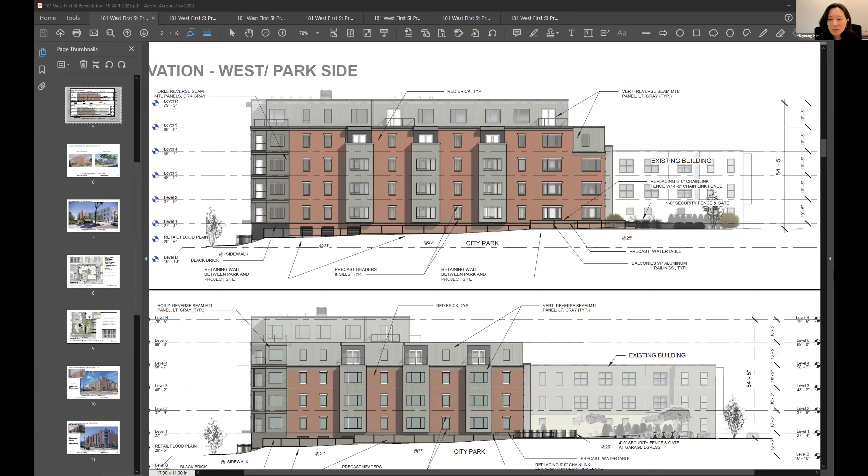Yeah, that'd be great. I just wonder if there's something, this neighborhood feels a little neighborhoody, right? Maybe families live here. I see in the Google Street View there are people pushing their strollers, all the folks who live here. Maybe there's something about programming of that public park that differentiates it from the public park next to it. It'd be great if there was a connection, like a path between them, but if not, if that's not possible — but I think there's already lawn in Mahoney Park.

I just wonder if there could be some more backyard programming, like vegetable gardening or things that kind of hearken to a neighborhood and make this feel more homey. So that would be my one piece of advice. It feels like it could use a little bit of programmatic character that's unique to the demographic who's living here. So those would be my only two comments.

Maybe I'll chime in because I have seen this project a couple of times, and I think where this project is happening is right where it's transitioning from the townhouses or row houses to much larger projects. Definitely along West First, definitely along Second, you'll start to see these bigger Texas wrap style apartment buildings. I think what they're trying to do is balance the project viability and respond to some comments we've suggested.

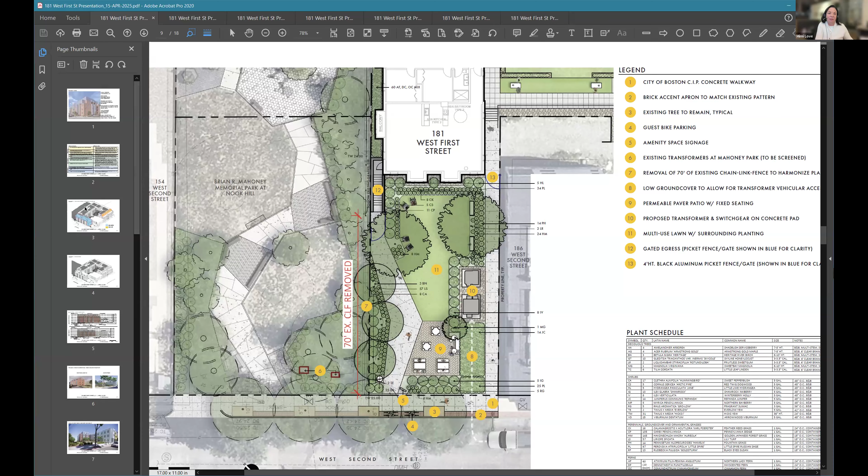They need to ensure that the quality of Mahoney Park is not being compromised. So I do think that before and after of that massing change helps to contribute positively to the park. We were very worried last time about that increased height. It was good to see that shadow study showing the park was not affected more than what was previously approved, because that's one thing I'm very mindful of.

I definitely think where you've added square footage seems to be reasonable. And certainly the height on First Street is going to be in line with other projects we've approved along First Street. So I think the massing has improved. I do have some issues with the architecture, but that's at least my thoughts from seeing this before. They have come a long way in that regard. I can understand that process.

My initial reaction, and I don't want to say it unequivocally, but it still feels pretty big. I know there's been an evolution towards this, which I really appreciate, but I wonder if there's some way in which Mimi could talk about the facades, because it feels almost like a wraparound, but the first and second street are very different. Yeah, no, I totally hear that. Maybe we could get a site plan too.

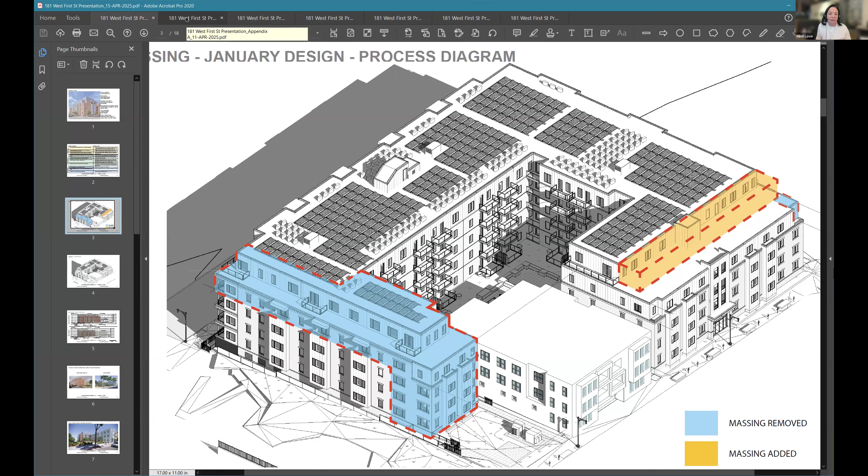What is a little bit also unsatisfying to hear is that the park wasn't interested in connecting. Can we go to a site plan? Yep, we'll go to the plan.

That wasn't interested in making those connections because I feel like you have a pathway similar in scale to the existing pathways at Mahoney Park, but you're not actually going anywhere—you're going to a stair or an egress stair. That feels like it could be confusing. You might get people walking their dog going up to a place you don't want them to go. So if there's not that interest in connecting the park, maybe those visual cues have to redirect another way. I like the intention to connect to this park, but I don't think it's working in your benefit to have that big path leading to an egress stair.

But I do think making it seem like a bigger park at the front end and getting rid of that fence is a positive for sure. Maybe use different terminology—instead of calling this a park, it's more like a yard, something more residential, where people barbecue, plant vegetable gardens, do things people do in a domestic setting that they wouldn't do at Mahoney Park. Maybe we accept that they're two separate spaces, this one dedicated to the development. I agree—having that really wide path feels a little commercial, like you're trying to mimic the public park, and maybe it just gets scaled down a bit.

I believe there are community gardens in the upper part of the park, you can kind of see them, the top ones on the left. I'm interested in how successful they are, because a lot of community gardens are so successful—there's months and months of wait list. I walked by it in Google Earth and it looks very charming, a little scruffy, there's a wood shed, and I kind of love that. I like that it feels less corporate, not completed and finished by the residents. So I think the more it can be inspired by Mahoney, whether vegetable gardens or flower gardens or whatever.

Commissioners, I was hearing some very good commentary and specific asks for additional material, particularly to put the building in context and better describe the scale and relationship of this building to other buildings, not just 186 West 2nd Street, but up and down 2nd Street as well as 1st Street. Mimi, do you have comments about the facade architecture you want to relay to this applicant? I'd like to invite additional comments please.

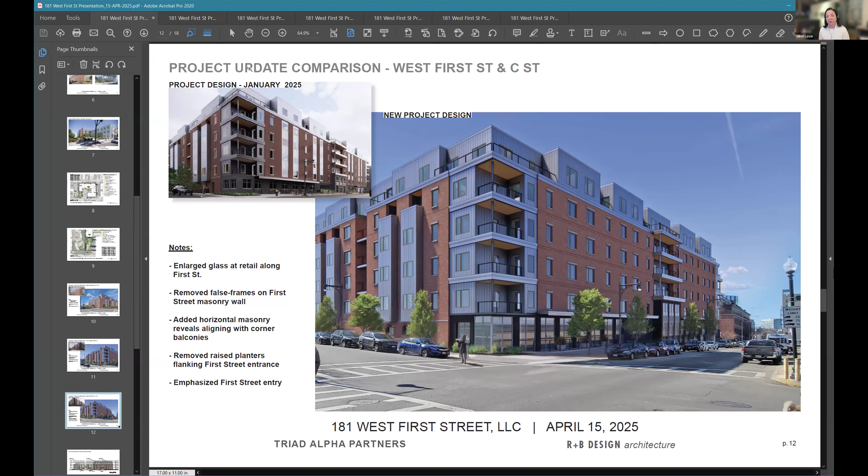If we go to the West first, I think you've simplified the massing, simplified the moves, which is always good—the simpler the better. I still think there's architectural language around these corner posts and balconies that feels really uncomfortable to me. I don't know what the right solution is, but this corner open balcony moment and the two-story height entrance—the language doesn't feel very cohesive yet.

The other architectural comment I have is when you have those bays that overhang—I know you have plantings underneath, but they just feel like shadow areas. You might want to think a bit more about that language, like does it taper or something. I don't know that putting a window into the garage is the right architectural solution there, because as the grade changes those elements come really close to sidewalk height.

I don't know, any commissioners have any comments? I know David, you joined midway through the presentation. Just two comments—I agree with what you just said, Mimi, and I wonder if there's kind of a disengagement of the corners from the body, and a sort of uncomfortable change in scale.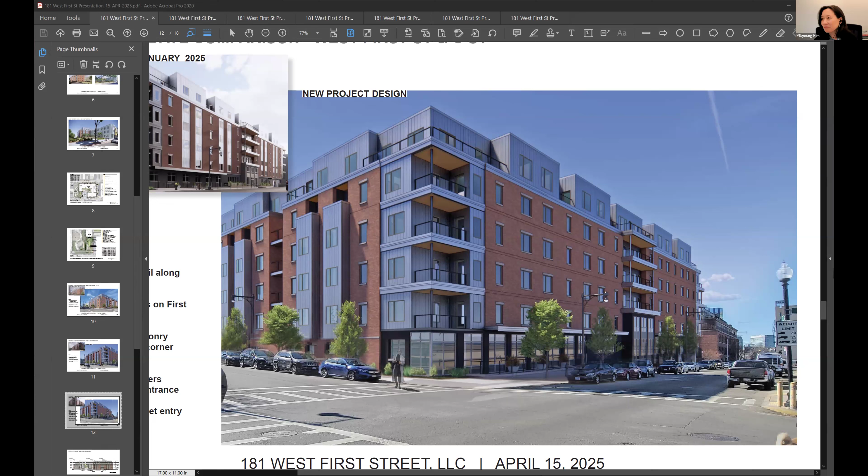Okay, commissioners, do you have any more comments, or should we look towards public testimony? I'm ready to go to public testimony. Good. We can always follow up with more comments.

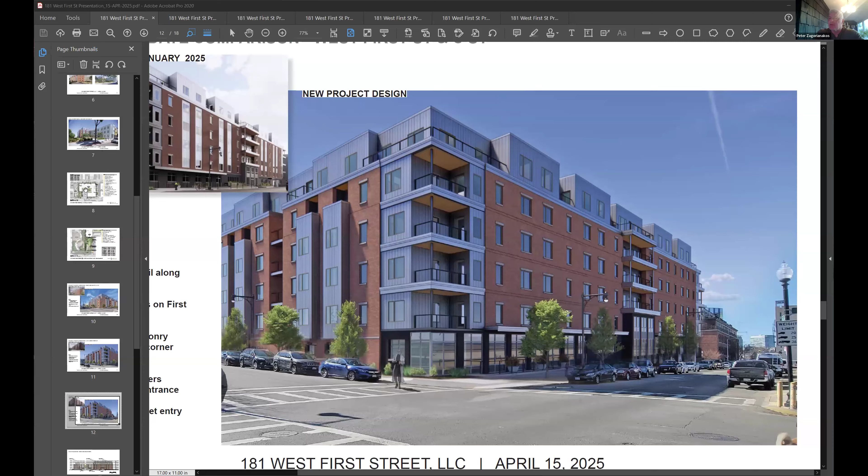Okay, seeing none, I'll return it to the commissioners and ask for the proponent to share their screen again and maybe put up a site plan. Ron, you want to put up? Would you like a site plan, Seth? Is that what you requested? Yep, okay sure, we can start here to see if the commissioners have any other additional thoughts or questions.

There was one other comment that I did want to just offer. The sidewalk that's along C Street at 5 feet 4 inches wide seems fairly narrow. I don't know that that's really following any complete streets guidance in terms of widths.

It's actually 9 feet: 5 feet clear and then 4 feet for the tree pit, and then we have, I think, 4 feet 3 inches after that. So the question is, do you actually need that foundation planting of 4 feet? I don't know, there's no foundation planting. The retaining walls are now gone.

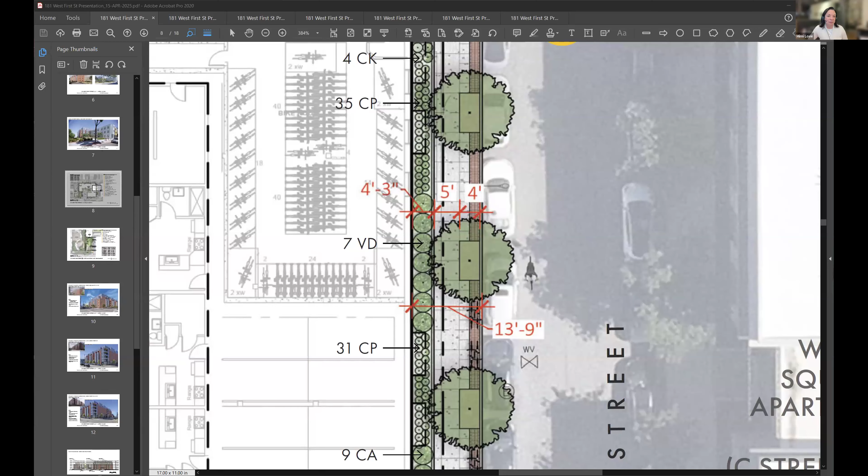So I think commissioners, we have a big decision to make. Have we given enough guidance that the proponent can work with the planning staff on these revisions and come back to full commission, or do we need to see them again as they work through the revisions we talked about?

It does feel to me like there's more work to be done, but I'm not a good judge of when that should happen and with whom. So I'm going to leave this to you guys. This is my first time seeing it, so I don't feel it's fair that I make that judgment.

Anne Marie, you unmuted yourself. Yeah. What are you? I guess because I had asked questions about the landscape.

I think the proponent has done a good job of addressing the specific scale issue of stepping down to meet the park. When I think about our responsibility as BCDC, a key aspect is understanding the building within its context. I understand, and I was present for the previous presentation, that you are negotiating the change in scale between the neighborhood and an area that had a whole different scale of building. So the one thing I think is missing in this presentation, in addition to the issues discussed in this forum, is that the absence of an understanding of how this fits within the surrounding context is a little troubling.